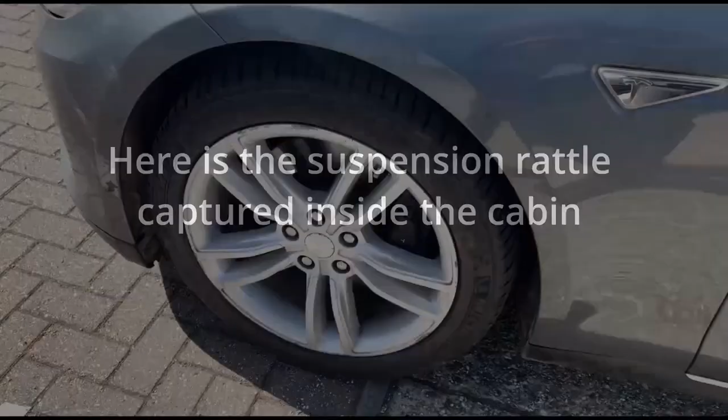Hopefully we'll capture this noise now as we go over the drain. There it is. Come forward again. A bit quicker. There it is. There's the gully. Let's come forward. It's actually rattling before we even got there.

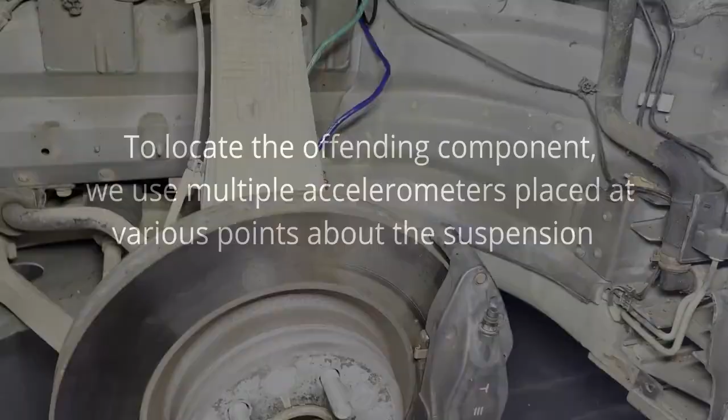So Model S with P85, sorry, Model S with rattle from the suspension. So there is something rattling here as you go over a drain grid, and I thought, yeah, this will be a piece of cake. Fetch the arch liner off and there'll be something up there, but no, other than a big spider. Oh, you can see that. I think it's dead. I hope it is.

Anyway, yeah, so now I've gone for accelerometers. I've actually placed one on the lower caliper bolt there, one on the anti-roll bar link, I hope that's coming through, and one on the upper wishbone, the top wishbone there. Yeah, hopefully you can see that. Yeah, and I'll put a microphone in as well, and then we'll drive over a speed bump and see what happens.

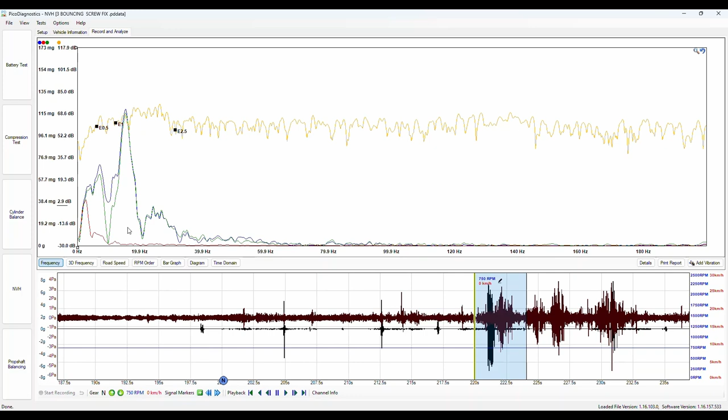Okay, so here we have the results from the first road test. This is where the vehicle was driving over the gully heading toward the drain, and this is the area of interest here, these instantaneous events. Now let me just show you what they look like in the frequency view. Difficult to determine. We can certainly see a higher activity from blue and green there, and it appears to be around about 10 Hertz, but that's not really what we're interested in. We're looking at amplitude and events, shocks, which is exactly what these knocks are. And I think we can safely say here that green is standout.

So to see what is fitted where, A, remember, was the lower caliper bolt, B was the top wishbone, and C was the anti-roll bar link. You can see they're all mounted in a vertical. We're all measuring the y-axis. And here on channel D, these differ slightly. This is actually a microphone inside the cabin, so we try and correlate events here to what we see here on the accelerometers, and I think we can safely say top wishbone doesn't look to be of any concern at this stage. So let's have a listen to this so we can play this back.

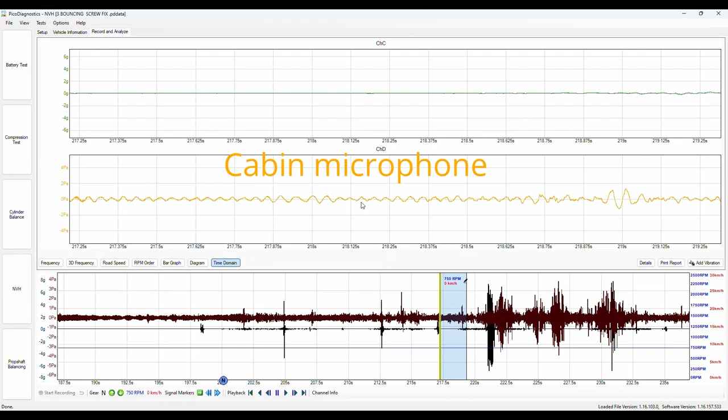So hopefully you just heard that. Let's do that once more. Yeah, there it was, as dull as it sounded. And let's go to channel view. So we do right click, channel view, and we'll take away A and B. And hopefully we can see, well, let's have a look how we just have this almost varying sine wave until we get to here, and then we get this disruption here that looks to correlate with these knocks. The fact that these shocks appear when we hear the knock, that's enough evidence to me to suggest that this is our offender.

And go back to the right click view, A and B, and again I think we can probably go for anti-roll bar link based on this. That would be my go-to component, if I'm honest. They tend to be common offenders. What's really cool now though is we can highlight this area here, right click and export this region to .wav.

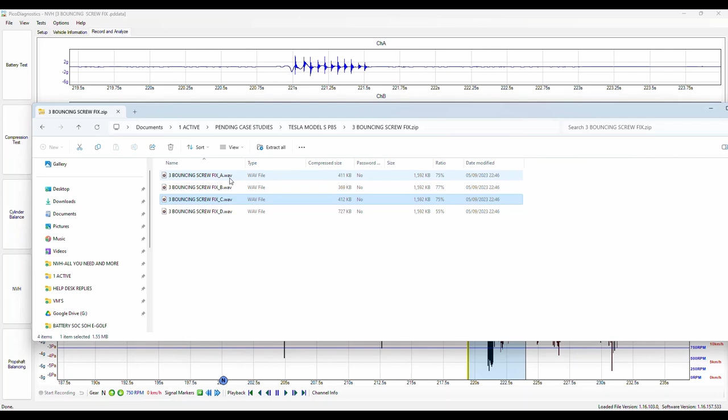So we can export all channels displayed here and then listen to them. So then not only will we listen to the microphone playback, but we'll actually listen to the accelerometers, and that's where the real diagnostic value is. So what happens when you export, you end up with a zip file that looks like this, and there they are. Look, this is channel A, B, C and D.

So if I click on A, there we have noise detected in the caliper or caliper mounting bolt. Let's do that again, and let me just tidy up a little bit here, and now we'll do channel B. Now that is top wishbone. It's a much duller sound.

This is anti-roll bar. Channel C, anti-roll bar link. Yeah, much harder, much more repetitive. This is channel D. This is the mic in the cabin. Much duller sound, isn't it? So good news is you can hear it in the cabin. That's what the customer can hear. That's what the customer's complaining of.

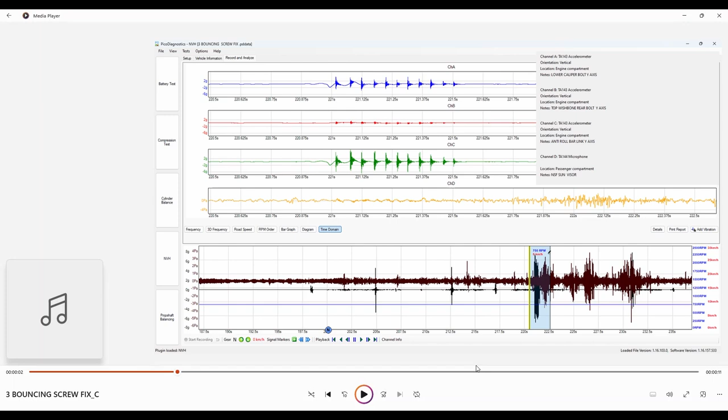So let's go back to A again. A was caliper bolt. C is definitely the harder one of the three. C was anti-roll bar link. I'll just play back B again. Okay, so based on that and based on this amplitude here, I think it's fair to say that we can perhaps go ahead and remove the anti-roll bar link and road test again and see what results we get from there.

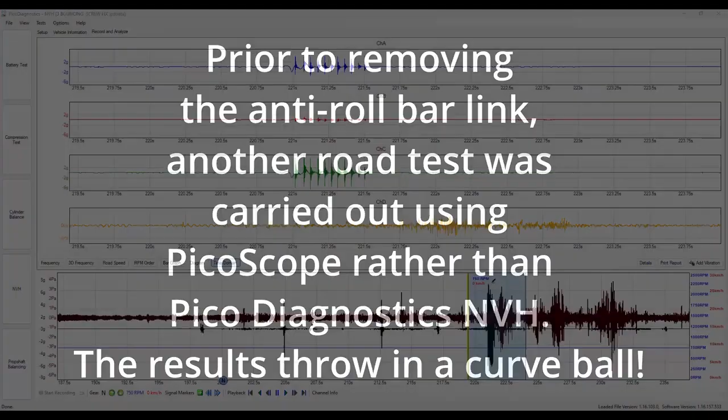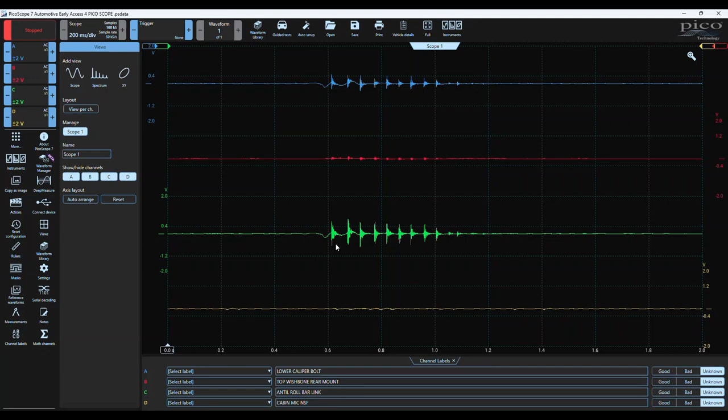Okay, so here we have the results of a similar road test driving over the drain gully, this time using PicoScope rather than Pico Diagnostics NVH. And if I go to the views and go auto arrange, you'll recognise this hopefully immediately from the time domain view in Pico Diagnostics, because that's exactly what it is. The beauty of using PicoScope is that we can zoom and we can measure the time, so we can look for the first responder, and this is where I was going with that comment when I said curveball.

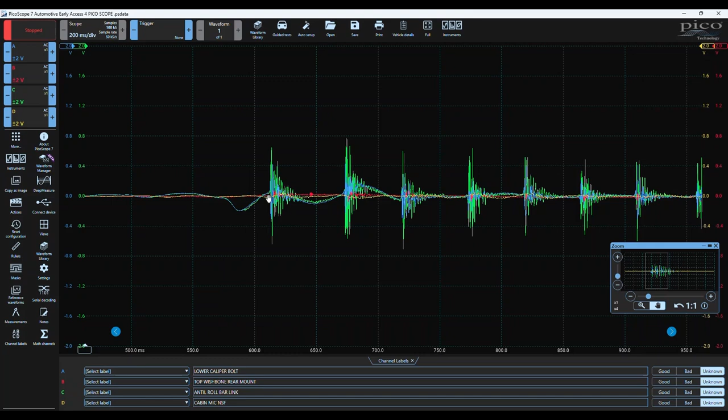So let's just reset. Just to run through where we are, channel A, B, C and D are exactly the same as they were in NVH, so nothing has changed there. But I wanted to zoom in on this area here. So first of all, this is undulation in the suspension. So this is just the suspension rising and falling as we ride into the drain gully. But this is a knock. This is the energy generated from a knock.

So I'm going to zoom in on this area here, and hopefully you can see immediately, whilst channel C has the greater amplitude, channel A is the first responder. I'm just going to increase the scaling by 1 and the same again on channel C, and it's fair to say most certainly channel A, which is connected to the lower caliper bolt, responded before the accelerometer connected to the anti-roll bar link. That is definitely not what I was expecting.

If we say our response time is around about there, and it's difficult to say where you draw this, but I mean we're talking microseconds, aren't we, between? But let's just look at it on face value. Most certainly A responds before C, even though C has the greater amplitude.

Nevertheless, we are going to remove the anti-roll bar link, because that is not going to cost anything other than a bit of time, and if the knock is still there, then fair enough, the anti-roll bar link is not our offender. We'll also shuffle the accelerometers around in the next test as well, because the accelerometer connected to the top wishbone was really revealing nothing, was it? You can see there in the red waveform. Let me just pull the red down. That was channel B. Channel B was top wishbone. There was no knocking energy there, just undulation.

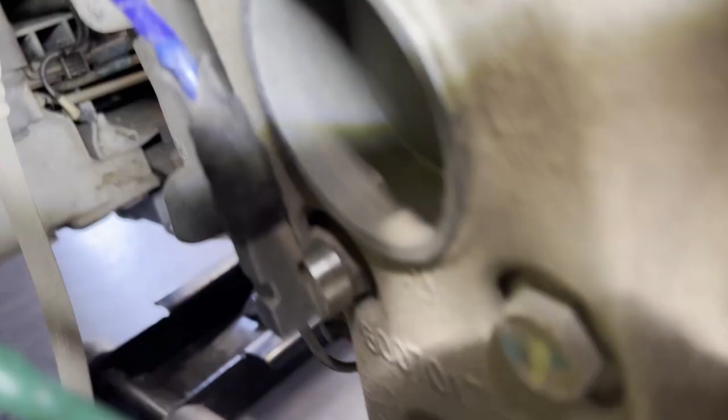Okay, so the anti-roll bar link is now removed, and we've gone for accelerometer on the anti-roll bar. Leave that one on the shock absorber, and let's turn the camera around, hopefully we can see this. We should have one on the hub bolt there on the inside, so we'll see what transitions that's made in terms of noise.

Okay, so here's the results from the next road test where we'd removed the anti-roll bar link, and we were right to do both. We were right to be cautious because whilst the amplitude was greater in that component, it was not the first responder, and nevertheless knock is still there.

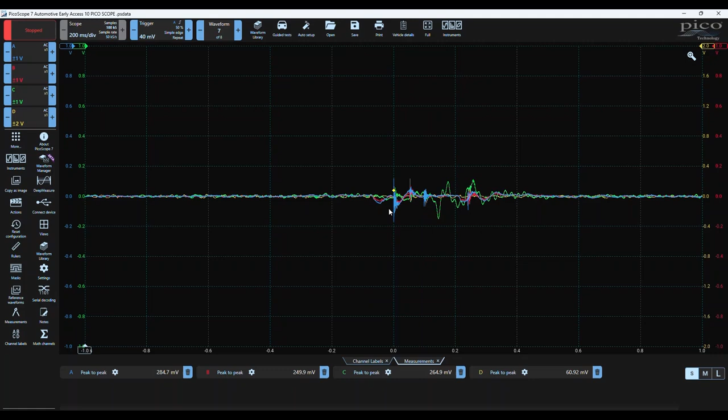Quick check there is to just use the peak to peak measurement for A, B, C and D, and let's make them small, and we can see there the greatest peak, channel A 284, peak to peak 264 on channel C, and 60 of course. Yeah, either way, let's zoom in here and let's change the scaling. Let's go up by 1 for all of them. So just roll my thumb wheel on the mouse up or down to increase or decrease the scaling.

And remember that these smooth progressions, this one here, that is not a knock, that is undulation, and it kind of makes sense, doesn't it, because channel C, let me pull that down so we can see that clearly. Channel C here is responding to suspension movement because channel C was the accelerometer connected to the anti-roll bar link. Sorry, not the anti-roll bar link, the anti-roll bar.

So the anti-roll bar will be receiving movement because it's still connected to the right-hand front or the offside front suspension. However, it looks as though it's receiving some energy somehow from the knock. It's certainly translating into there. Unless there's contact, of course, there shouldn't be. Yeah, I'm curious about that. Anyway, let's put them all back to 0 at the same position.

Zoom in here and look for our first responder, and wow, there's not a lot to choose between those, is there really? Channel A front hub bolt, so again it was caliper bolt before, we'd moved it to the hub, and they're bolted to the same mass, so again there's not a lot to choose between. If we'd had one on the caliper bolt and one on the hub, it'd be very interesting to see what the difference was between them. It would be very little, but this is now interesting.

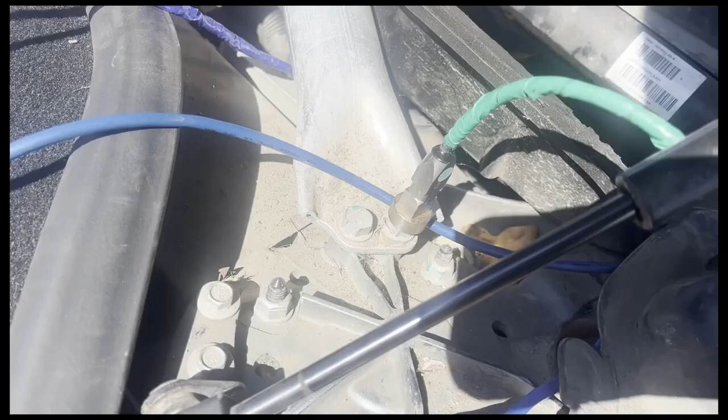Okay, so this time we're going on shock absorber completely, so we've got the upper shock mount there, and coming down under the arch we're going shock absorber midway and then shock absorber at the bottom. Okay, so here we are with the complete analysis of the near side front shocker. So A is the lower mount where it bolts to the lower arm, B is the shocker tube itself just below the spring saddle plate, and C is the left hand upper shocker mount.

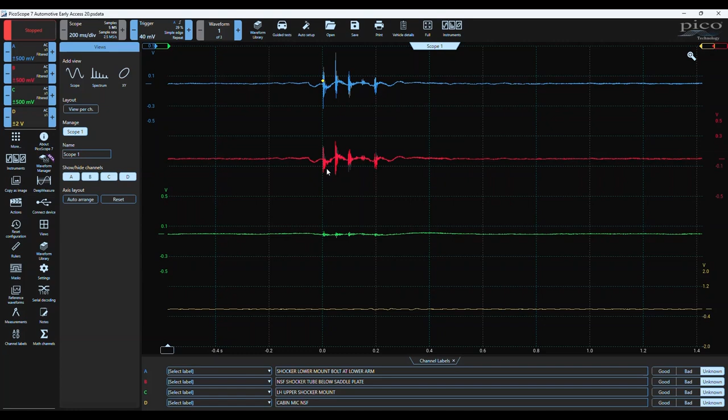If we go to views and reset, auto arrange, there's our NVH view, and we know from the shape, this cone shape, this ringing, that's our high energy, that's our knock. Let's reset that and zoom in and look for the first responder. Now the trigger was set on channel A, we can see there, look, but B was the first responder. Okay, it was on the rise just before channel A.

Let's have a look at another knock. Let's choose this one. That one again, and that one's a difficult shout, isn't it? That is definitely the knock there, isn't it? That momentary spike, followed by the ringing. Oh, it's a tough shout whether that would be undulation and then that knock.

Let's have a look at this one. Yeah, that one again, toss up between those two, isn't it? And this one here, same again. Okay, so we are looking at A and B. So we're not looking, according to that, at the upper shock mount, which is good. That's right at the top. That's something that did concern me. I thought that could rattle like we've heard in the video, upper shock mount, but we can exclude that.

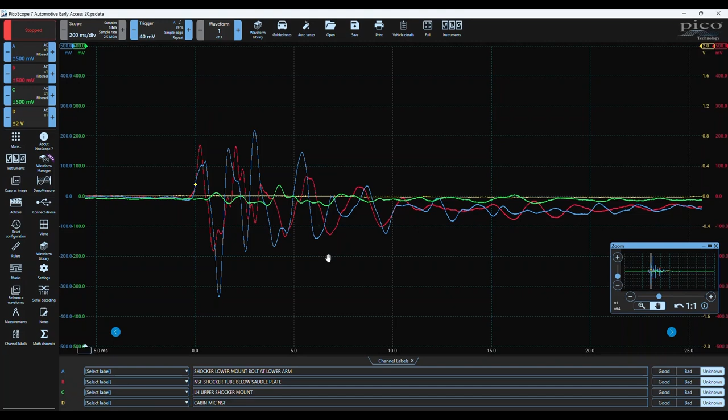Let's just pull that down and have a good look at that. There's nothing, is there really, by comparison? And when we zoom in on all three, it's certainly not our knock. So there's a component we can certainly exclude. And based on this, I convinced myself that we needed a shock absorber.

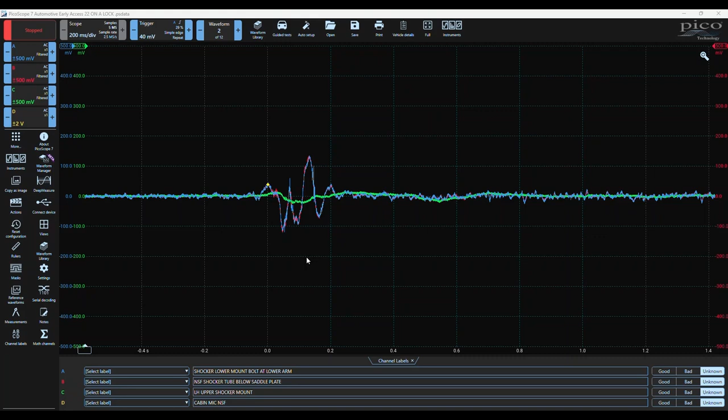So here is a capture of the vehicle driving over the drain gully, but at full lock, so either full left hand or full right hand. It didn't make any difference, but I clearly noted that the noise wasn't there, and there is the proof. If we move on a little bit, there again, no instantaneous knock. It's quite jagged, but ultimately that is just undulation. Now, I wish I'd have studied this a bit closer, because this is a revelation if you look at this, because the knock on this occasion must have been evident.

And when we zoom in, look at that, it's clear to see that on the red, which is the shocker tube below the saddle plate, no knock is evident there. Yet here, the A, which is shocker lower mount bolt at lower arm, clearly a knock is detected there. Now on that one I've missed it completely, because again, focused on what I thought it was going to be, saw that and thought, yeah, that'll do, that's fine, without spending more time analysing the data.

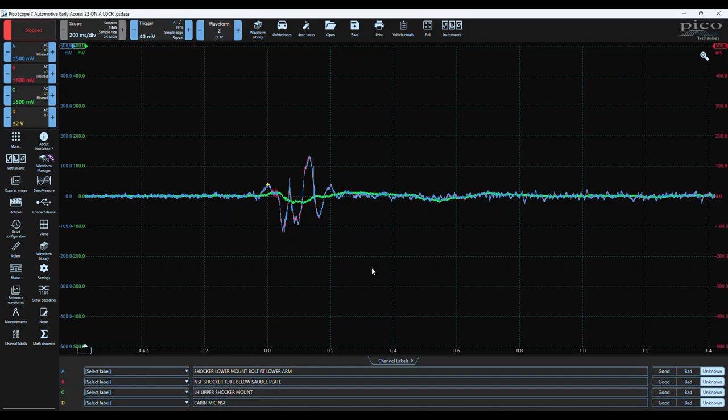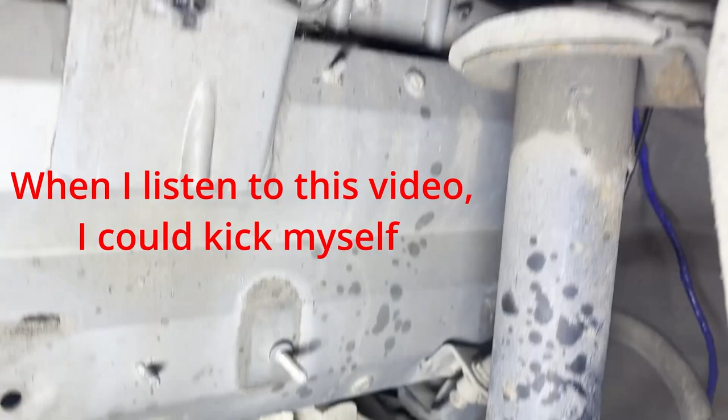Alright, so based on our findings, closer inspection on that shocker, it is damp there. I mean, that's not excessive, that's no real drama, certainly not dripping. But whatever that noise is, it originates from within there, so a shocker it is.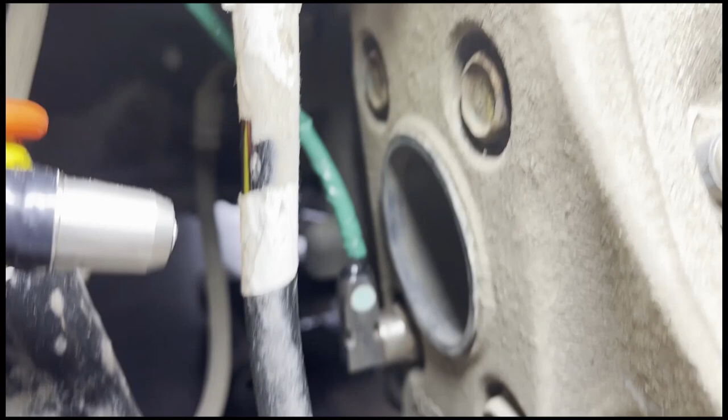Okay, interesting. That cap, you can see there, that is just a bung. This leg assembly that supports the hub is actually hollow, so I've been inside there with an endoscope but couldn't see anything adrift inside at this stage.

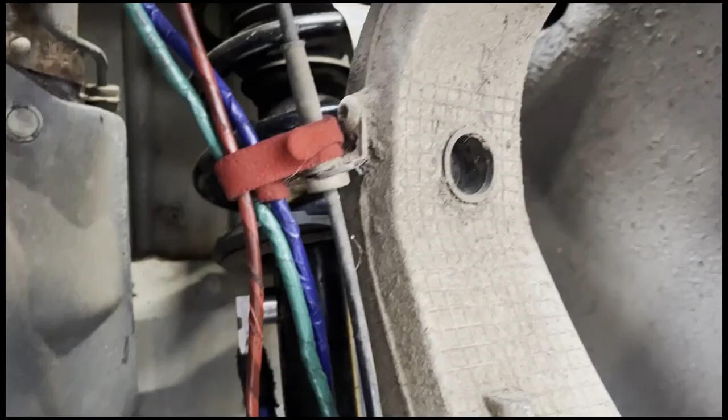Okay, so here we are with our first NVH capture after installing the second-hand shock absorber. And notice once again, it's 1, 2, 3, 4, 5, 6, 7, 8, 9, 10. 10 shocks in half a second, so approximately 20 in a full second had it continued. Same characteristics, and let's have a listen to it. It's identical.

Now I have made a little tweak to the software, so here's how we were configured. Channel A on the shocker tube as before, that was an accelerometer. Notice though that I've called it a microphone. There is a microphone on channel B aimed at the rear of the near side front hub, and then of course there is an accelerometer on the hub itself. Now again, that does look to have a greater amplitude. Remember, we can use the right click feature, channel in view, to get a little bit more resolution. But we'll bring them all back.

The beauty of calling an accelerometer a microphone is we don't have to do this export region to .wav to listen to them. I can actually just go channel in view, hide them, and now we can just listen to channel A. Okay, and same again, listen to channel B. Channel B will have more ambient noise because it is a microphone, remember. Certainly captures that in the hub, doesn't it? And then channel in view C. This is on the hub itself.

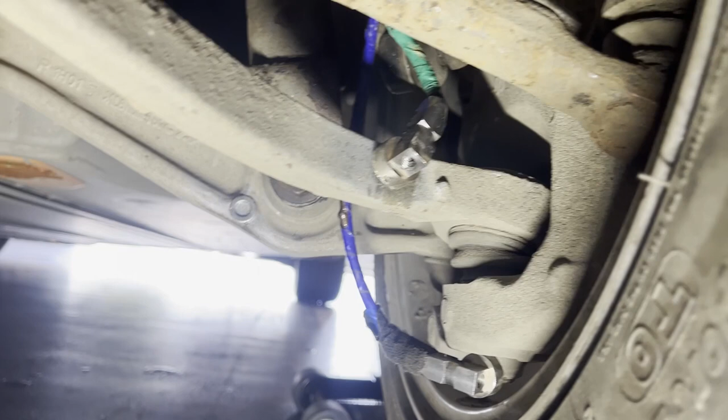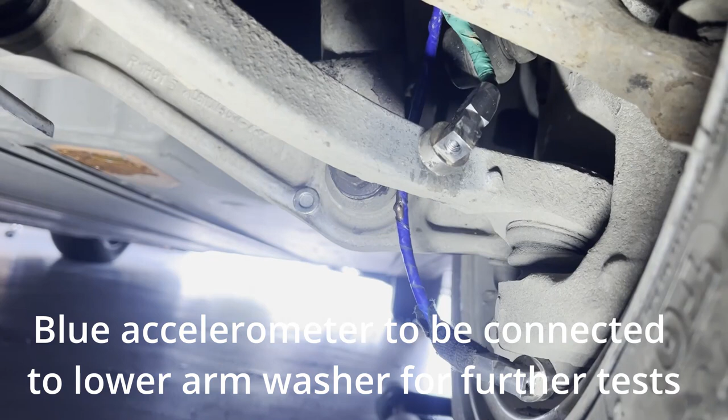So another change of tactic now is to mount or to bond washers onto aluminium components. So there's the bottom arm, there's our track control arm front, and yeah, it looks like at the moment we're getting a lot of response from this track control arm, so we'll pursue that.

Here we are with the results from the road test after the shock absorber replacement. So this has got the used shocker, and the blue accelerometer that you saw in the previous video that was just adhered to the ball joint bolt, that has been moved back to the lower arm, the washer that I was pointing out. We've got a microphone aimed at the rear hub, you can see there the low intensity, and then near side front track control arm, that was already in position in the video. So just looking at amplitude alone, there is definitely a lot of activity in the track control arm.

Let's do the channel in view. So if we take away 22.5 Pascal plus or minus, if we bear that and compare that with A and channel in view, take away C, yeah, we are a lot less. I think we're not even getting anywhere near 20 there, are we? So food for thought on that.

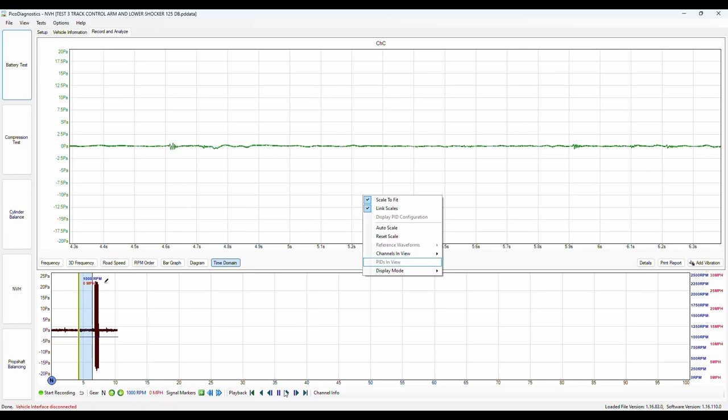Let's have a listen to them. So this is lower suspension arm. This one is the microphone aimed at the hub. Remember, there's a lot of ambient noise comes with that. And then channel C is track control arm. Right, but which was the first responder? So that's where we'll use Picoscope.

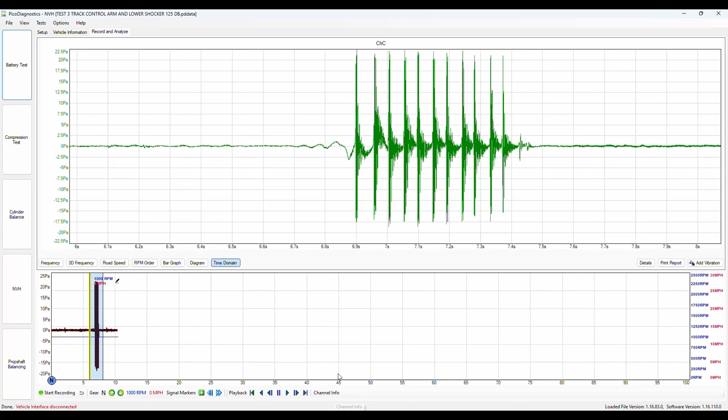Either way, just a quick one, because this amplitude here was so high, it would have overranged when I think it was set to engine compartment. You can go back into your setup and amend here. So normally we choose between engine compartment and passenger compartment. Well, now we can also increase that range as well. So this will take you right out to the maximum of 125 decibel.

This is where you will typically label up each accelerometer or microphone. And remember, we use the cheat for this one. We've called them all microphones, even though they are accelerometers, simply because we want to be able to listen to playback within the software.

Okay, so here we have the Picoscope capture, and nothing changes. So the blue is the accelerometer at the lower arm, mic aimed at the rear hub, and again, accelerometer at the track control arm. So these are on bonded washers to the aluminium arm components. And zoom in, oh, I think we can clearly see there, by a mile the first responder is green. Green is track control arm.

And I've also chosen to do peak to peak measurements between the rulers between A and C, because not only do we have a first responder, but we also have a greater amplitude. Don't dwell too much on amplitude, but certainly instantaneous first response. And these measurements are between the rulers. So in effect, Picoscope is only displaying measurements between these 2 points, these 2 time rulers here. And there it is again, that characteristic knock, knock, knock.

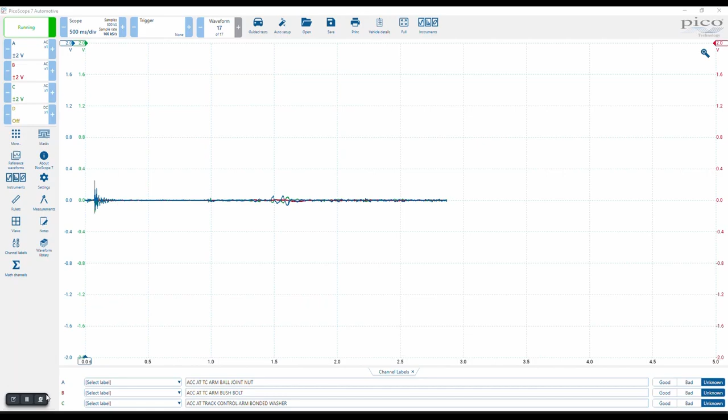Driving forward and driving in reverse. Here we are then with the 3 accelerometers connected to the track control arm on the near side front, and this is for triangulation now. I'm fairly confident something is going on inside the track control arm.

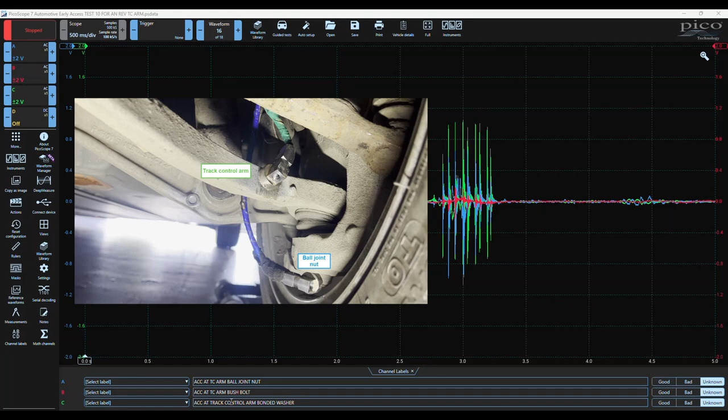So channel A is at the track control arm ball joint nut. We can see that in the image. Channel B is out of shot, but that is going to the track control arm bush bolt. Now that will be, to a certain degree, immune to this knock if it is generated in the track control arm. And then finally channel C, a track control arm bonded washer.

So let's just go straight to the centre of here, and let's come back one. Let's just roll the mouse wheel just to increase scaling. And yeah, this is undulation. There's not a lot of movement there in the red, and it's a toss-up, isn't it, when we look at this, where this energy is coming from, pretty much between green and blue.

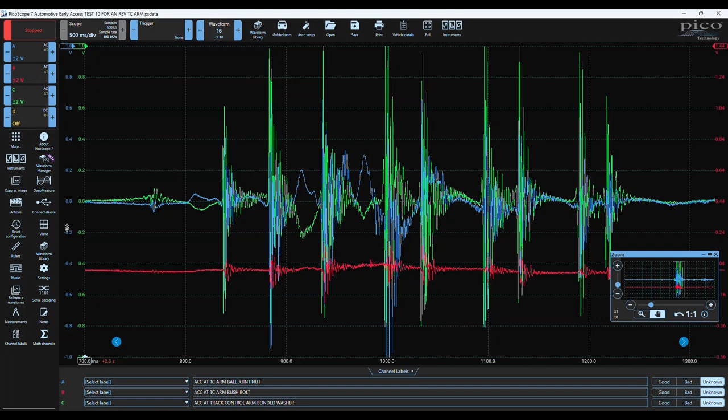If we're going to focus on this spike here, we would say it was the green, which was bonded washer on the track control. Just look at the red. The red looks to be immune to this knock. Let me just see if I can get some better separation here. Let's just zoom in and reduce the scale again. Yeah, it is detecting the knock, isn't it? But it's certainly not exposed to the high energy that we see above there, so the bush is doing exactly what it's designed to do.

Looking now at reverse, because this knock was generated in the forward direction. Let's go to buffer 17, which was reverse. We'll just reset the view layout and zoom in again. And I think this is quite intriguing, the fact that nothing really changes whether you are forward or reverse. Channel B, we can forget about that. It's still between the track control arm and the ball joint.

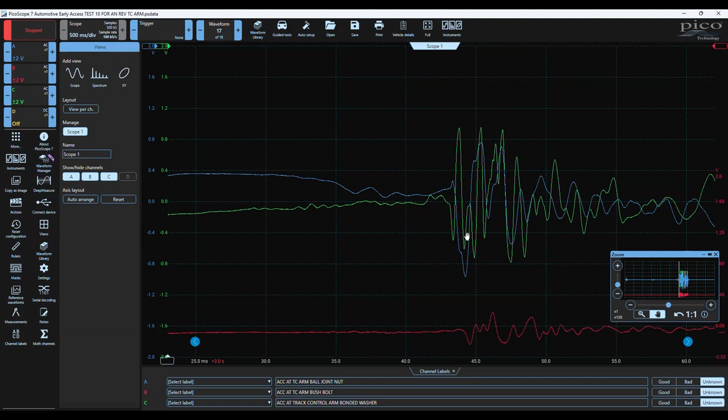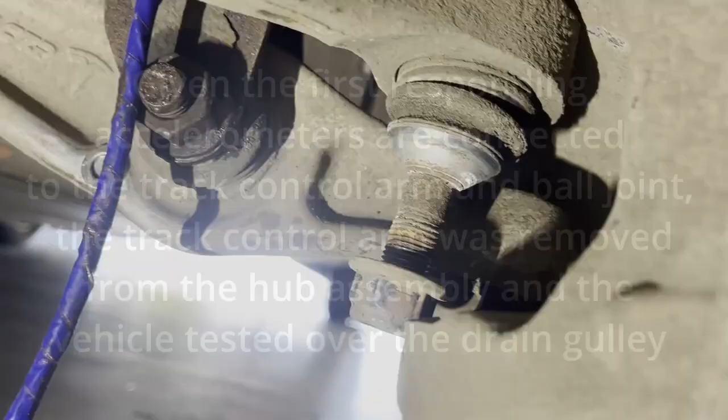Okay, so this has now been removed. This is track control arm from the hub, and well, there is play in that, but I can't get it to pull in or out. I'd expect that to have moved in this direction, in and out. Maybe there's a spring underneath it inside here that's taking out any play. But what we'll do, we'll give that a run now in that condition, see if that noise has disappeared.

Okay, so I've just come out with the track control arm disconnected from the near side front suspension. We don't do that, but we're in a controlled environment. I just noticed there that I thought, could that still be there? No, that is a different signature. I think that is the track control arm. Whilst it's out of the hub, it's still in close proximity to the hub, so there is movement. That's a collision by the look of it.

But this is when I drop into the drain gully that I'm testing, which is completely different to what we've seen before. So resume recording, and we'll go in reverse over the drain gully. It's a single knock, not the repetitive knock, knock, knock that we've been seeing. Come forward over the gully. Nothing. That's the interesting bit. That, I'm sure, is reversing. That's a collision of the track control arm with the hub, just resting in the hub.

Coming forward, that's absorbed. That is definitely different. Let's go back in reverse. Yeah, it's different. That is different completely. Coming forward. Okay, I think we have a result there.

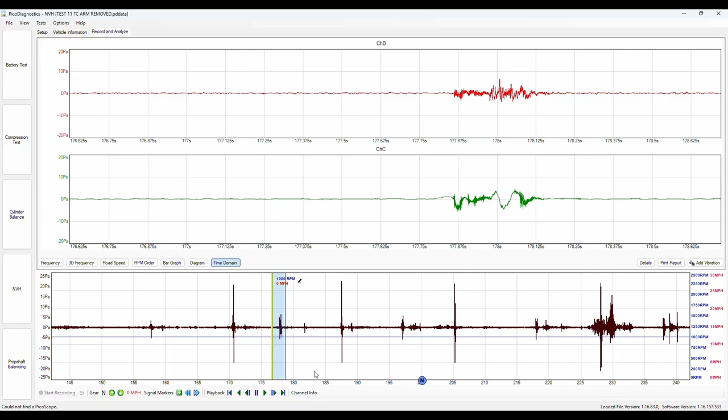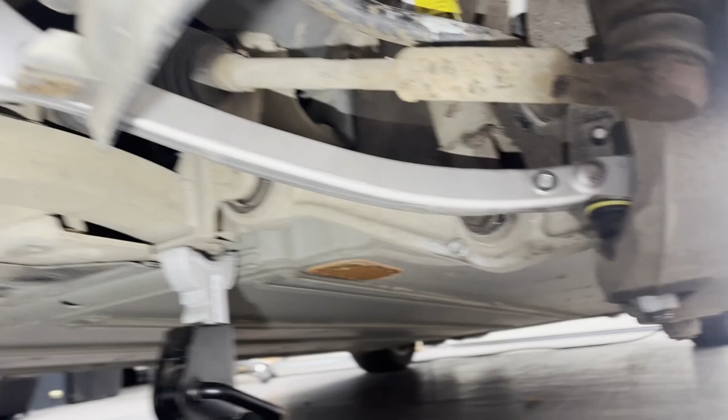Okay, so that confirms, whilst they are demonstrating an event, a knock, an instantaneous noise, it's a collision, it's different to what we've been listening to. Alright, so there it is, new track control arm. And yeah, I've bonded a washer on, just waiting for that glue to settle so we can then go back out and compare it with the previous one.

Okay, so here's the acid test over this gully. Nothing. Brilliant. There we are. Okay, so here we go. New track control arm on and reversing back over the drain grid. And wow, thank God it's cured. Coming forward again. No rattle. Reverse. Reverse back, hitting the drain grid just there, and then forward once again.

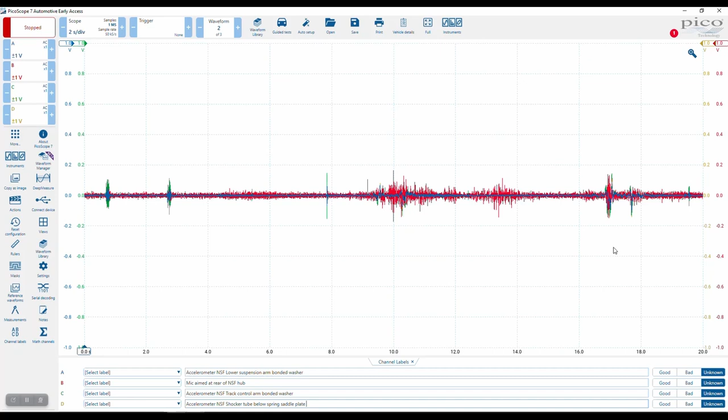Okay, so let's just have a look at the analysis there. Now we've got a lot of hash here. This is the microphone, remember, not the accelerometer. So I'll just pull the microphone down for a second. Let's move that aside and see, here we just have undulation now. That's where the wheel drops into the gully and back out again, with none of this instantaneous high energy knocking noise we had before.

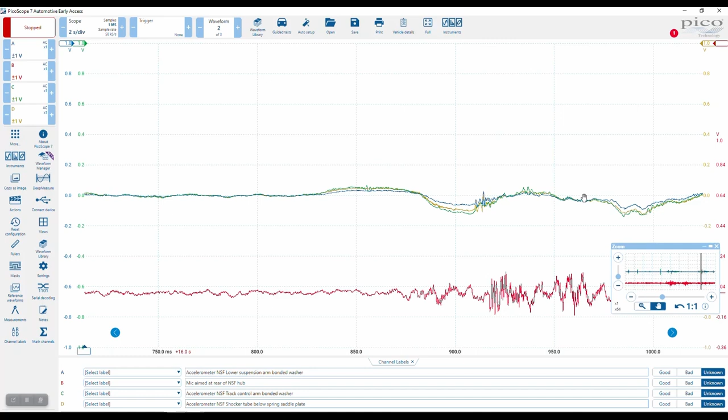So here is that capture then, now with Picoscope. So this would have been another road test, sorry, Pico Diagnostics NVH, it would have been another road test. That's pretty much the most activity there. We could look here, there's a bit there as well of course, and there, and not so much there, but we'll focus on this. Let's try and centralize that. So this is undulation. There looks to be an event there, not sure what it is, but look at the amplitude, it's so small.

Let's have a look at what is connected where. So lower suspension arm bonded washer on channel A. This is the mic aimed at the hub. This is accelerometer set as mic, near side front track control arm bonded washer. Remember, this is the new one. And this is the shocker tube on D. So we've actually got 4 sensors now. And let's have a listen to them one at a time. So we'll go with channel view. Let's go channel D to start with.

Let's just back up a little bit and press play. It's like we're not even listening to a file relevant to this vehicle now. It's so quiet from what we had. This is C. Near side front. Sorry, let me do that again. This is near side front track control arm.

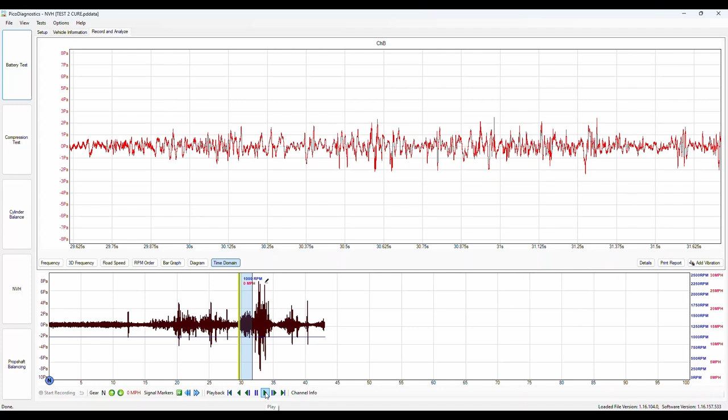You can hear the brake apply now. Just as you go over the knock, I'm applying the brake there. After, you can hear almost the grabbing of the disc by the pad. B, a lot of activity, but remember it's a mic. This is truly a microphone, so a lot of ambient noise now. Okay, and then the final one I think was bottom arm, wasn't it? Suspension arm.

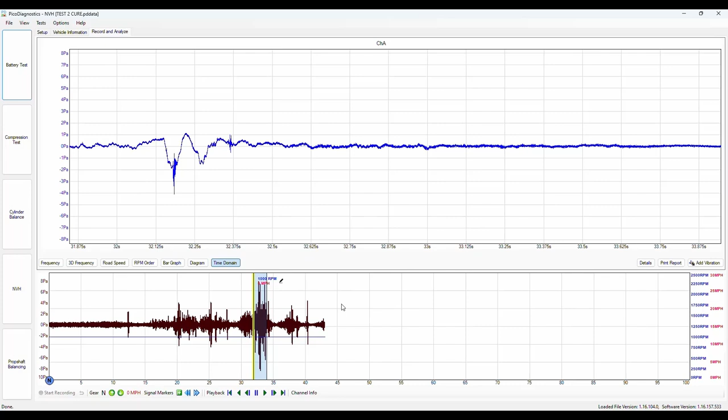Okay, so I think that's conclusive as well. Again, we have got an event there, but it's not relevant to what we're listening to. It could just be a combination of wheel dropping into the gully perhaps, or some form of contact somewhere. I can't explain that away, I don't know. Nevertheless, it's not the signature we had prior to the fix.

So here's the final post-fix analysis, just so as we can use the features in PicoScope to analyse it a little bit closer. You may notice, sorry, that I've been swapping and changing between light mode and dark mode. That's because I now prefer dark mode when I'm doing the analysis, but some of the video was shot in light mode. Well, that's nice and easy to change, so that is under your settings. And then if you go to theme, select theme, so we go light or we go dark, whichever one you prefer. I do find the yellows come out really well in dark mode.

Now we'll focus on, I mean, they all look like instantaneous knocks, don't they? But when you actually zoom in and analyze them, you can actually see that you're looking at undulation. So let's take this area here, or this one, doesn't really matter, but take away the microphone, because that does look like a knock there, doesn't it? And what you're left with now is purely suspension movement.

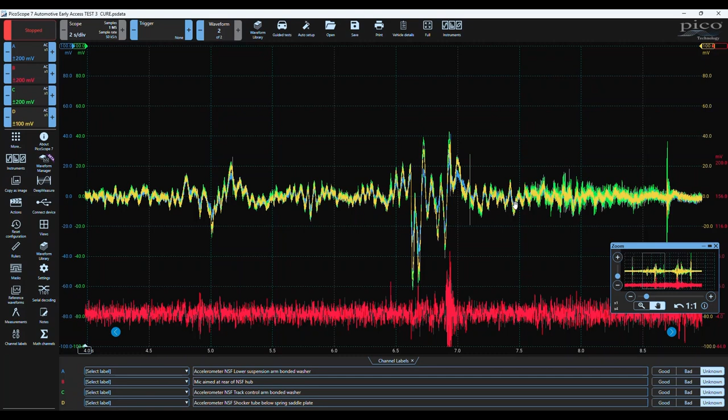Yeah, what we don't have is knocks shooting off. There's something here that is a knock, definitely, or it's some kind of contact maybe somewhere. There's a little bit in the blue there, but they don't correlate. They're not all together as they were before, with just that minimal time difference between them. So yeah, that's typical undulation from suspension. In effect, a sine wave, and the mic, unfortunately or fortunately depending what you're after, captures a lot of ambient noise as well.

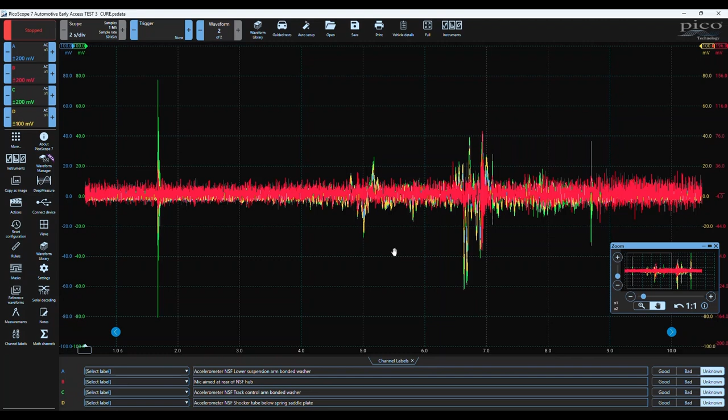Well, let's just run through this. If I click on the blue axis there, I can bring blue to the front, the same for green, same for yellow, and the same for red, so you can make those your dominant or bring to the front when viewing. Alright, I hope that helps.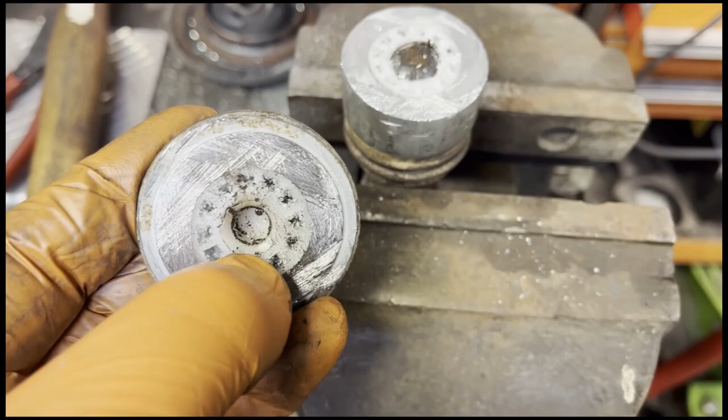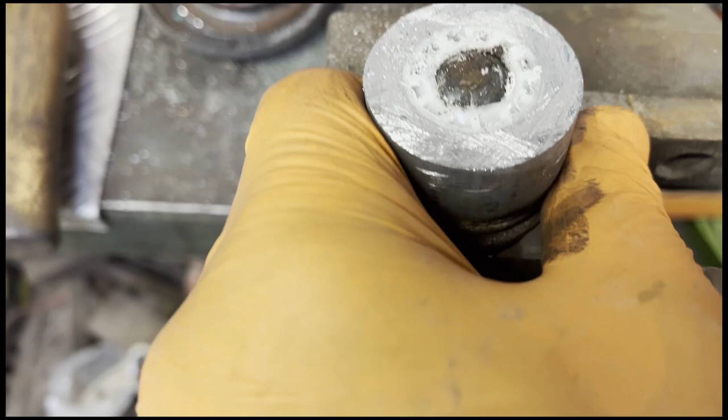Okay, so here's a cutaway of the ball joint that I've just pressed out of the track control arm, and that looks no more than a plastic cup that sits in the base of here. That makes up our ball joint, and if I just move that, you should be able to see the back of the ball. There we are, the back of the ball just moving in the whole joint. There we are. I can now feel some up and down, but still not convinced how we got that repetitive rattle.

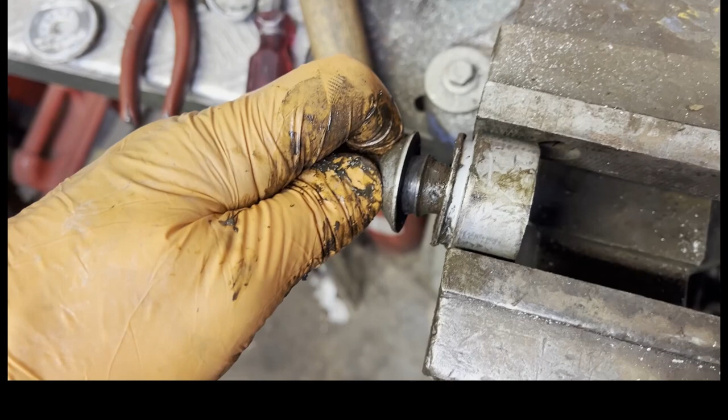Okay, so stripping a bit further, there was plenty of grease in this joint. I've just pulled the gaiter off. Yes, of course there is some up and down movement, but that's really, I think, pretty much because the seat of the ball joint is now missing. So still not convinced how that would give us that rattle, but I'll dig a bit deeper now.

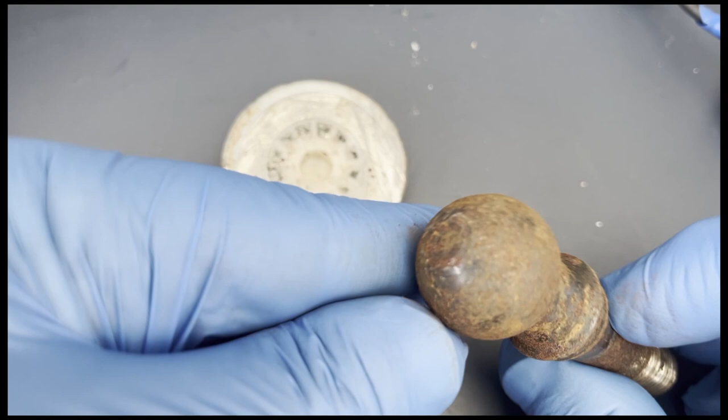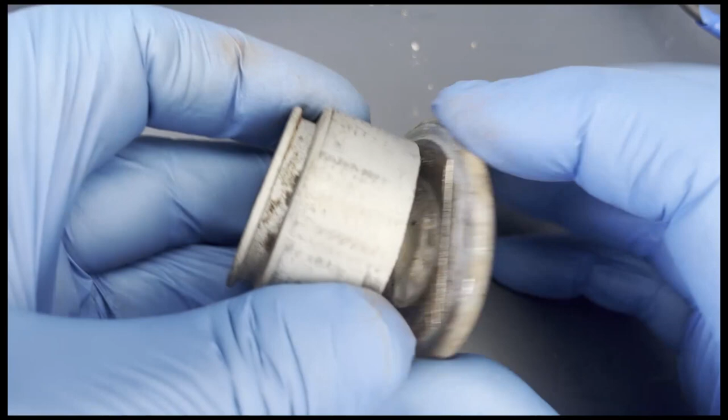Alright, so here we have the pieces of the ball joint. They've corroded now quite considerably because it's been a while since these were taken out. I think it was October last year, and I was looking for sort of telltale features. That's the cap off the base here, so that's how that would have gone originally.

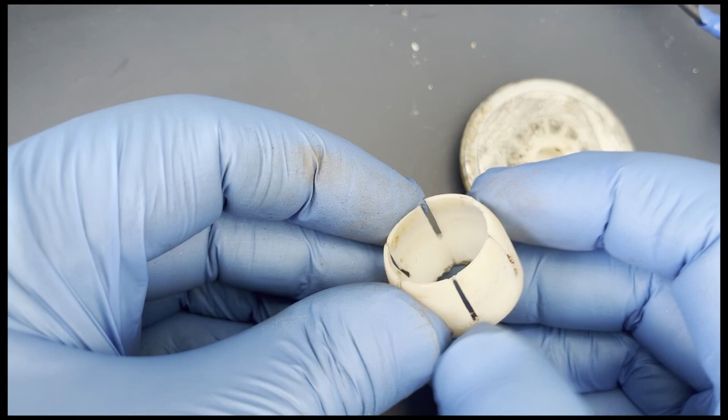What I have noticed is witness marks inside the ball joint. So if we look at the sort of sequential witness marks there, some are quite pronounced, like those two, that one, and then as we come around, it's much more fine, less defined. Now whether that's where it's worn through the cup, being this here, and if we look at this as well, we can also see that there are quite large gaps at some point and then smaller at others.

So we compare this one here to that one there. So there's definitely wear within this cup, even just looking at the rust marks on the one side and not on the other, whether or not that's where our knock was. So in effect, did we have our ball joint of course maybe moving slightly, because it wouldn't take a lot to generate a knock, but was there perhaps a degree of movement this way as well in the fore and aft?

I can safely say you couldn't feel anything when you tried to rock the wheel, and when you placed a bar between the arm and the hub, you couldn't feel any lift. You couldn't generate lift from this ball joint within this cup. So yeah, there, lesson learned, I guess.

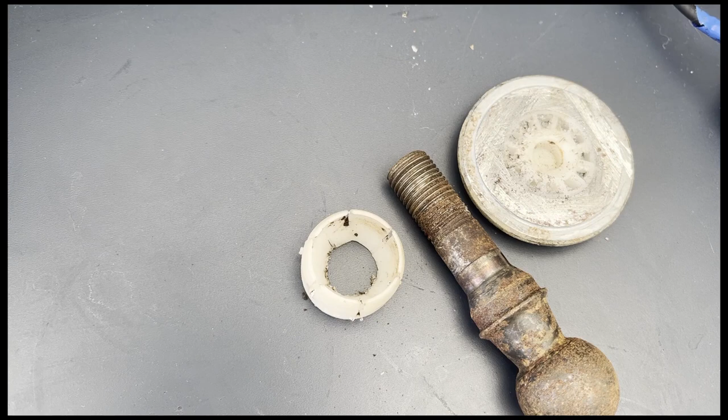So the message really is be guided by the data. Try and put any previous successful repairs that you may have had for similar symptoms, similar faults, to one side, and actually stick by the data, and that will bring about a conclusion.